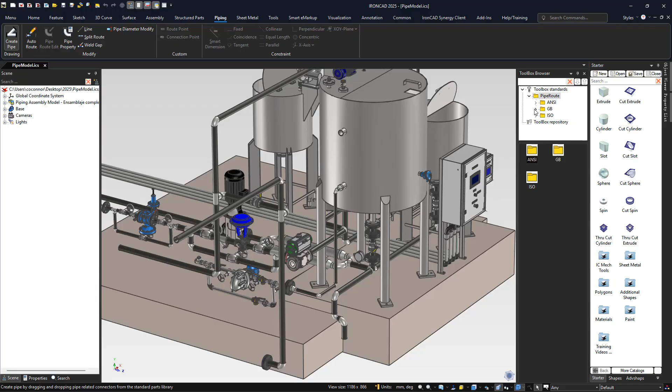But piping is what we're talking about today, so let me show you a bit about that. As I mentioned, the pre-release already has a sample set of data, which includes ANSI, ISO, and some GB files. You can see the sets here, and these mainly consist of pipe crosses, elbows, flanges, reducers, T's, and a pipe tube, for example, a simple pipe. That's the standard concept for the ANSI and ISO side.

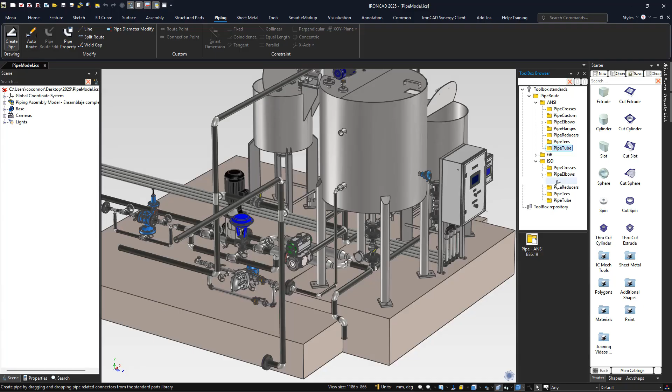This is currently built off of welded components, so most of the ones you'll see here are standards for welded pipe. In our case, we are going to work with the ISO side, and we're going to start with that flange. So we're just going to select onto our flange. We have two here that are available to us, and let's zoom in here.

What we're going to do is drop right onto the location with our weld neck flange, and we're going to drop it right on that center point inside of there, and now you'll be presented with a browser that allows you to select the various standards.

In our case, we have DN standards that we can set here. We can start with it, maybe we'll go up to 65 and see how big that is, which is a pretty good mix, but we can see that the inner pipe is a little too large for that.

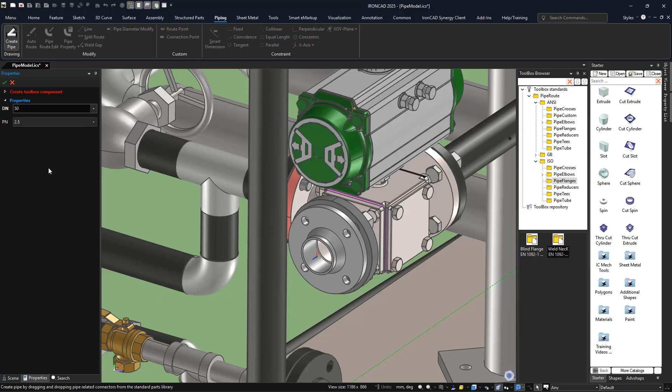Even if we're at the lowest pressure rating size here, let's go ahead and change that down a little bit, and maybe we can just bump it up a little if we need to get the right pressure. So that's a better size for our pipe.

Inside of there, let's change our pressure to maybe 6 here to see if that will update. Maybe we'll go to 10, see if that's a better size. That's a better fit, and it also lines up with our holes. So we'll use that one as our flange.

So that's our starting point inside of there. I'm just moving this around here so we can see it a little bit better. So now we're going to go ahead and hit OK.

This will take us into our pipe settings. In our case, we have a pipe that's going to be set for that 50 size DN that we selected for our flange. And then we have series inside here, which is basically your thickness on your pipe, so you can set different thicknesses.

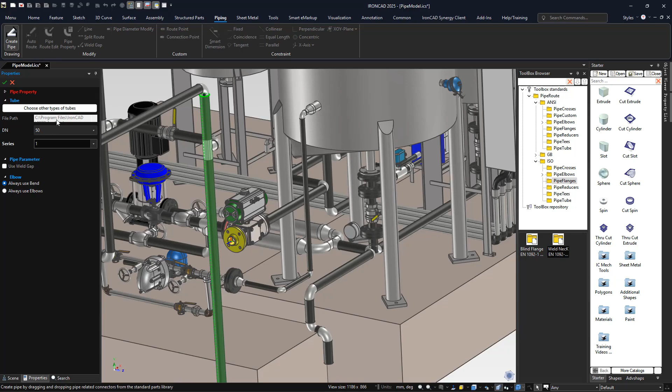And then you can add certain things like your bends or your elbows. So if you want to use a bend that just creates a pipe using a regular bend, like a sweep bend, you can use that. Or if you have elbows, you can select that as well.

By default, it'll go to the 90 for the particular standard that you started with, which in our case is ISO, so it's going to use the 90s for the ISO, which we'll use as our standard. So we'll go ahead and hit OK to apply that.

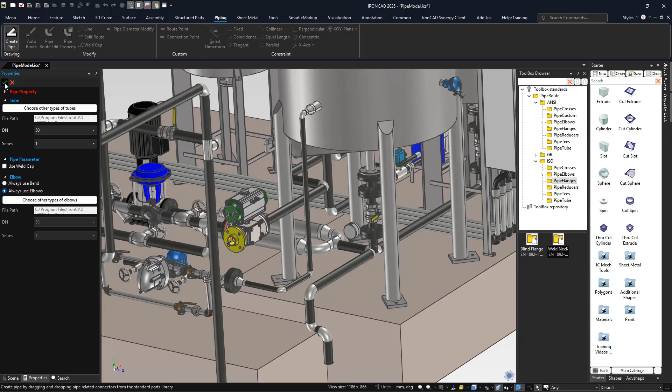And now it'll actually start us into what we call the 3D curve mode. In this case, it's really just talking about line geometry. We already have a starting point here for our curve, which we're going to use as our starting point, and we're going to use another line up here.

So we're just going to zoom in here, go to our line command on our ribbon bar, and we're going to pick that starting point as well. You can see this is similar to our 3D curve, which if you see the arrows there, it's got an X and Y. You can hit tab to change your arrow directions if you're trying to go different directions.

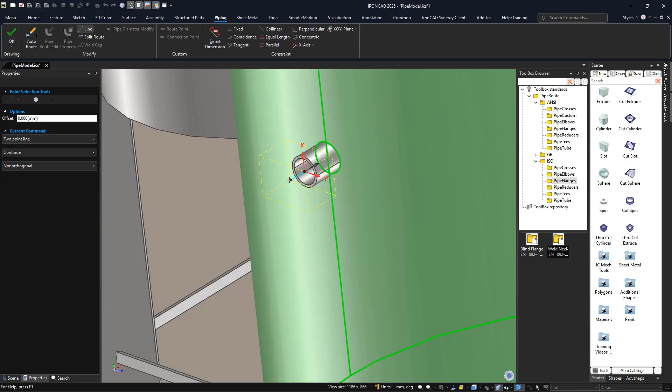In our case, we just want to come out of that pipe a little bit, and we can change it to not orthogonal or orthogonal if you like, so it only goes in certain directions. We want it to come straight off this pipe, so we're going to pull this out a little ways, and we can hit escape because we only want a single line.

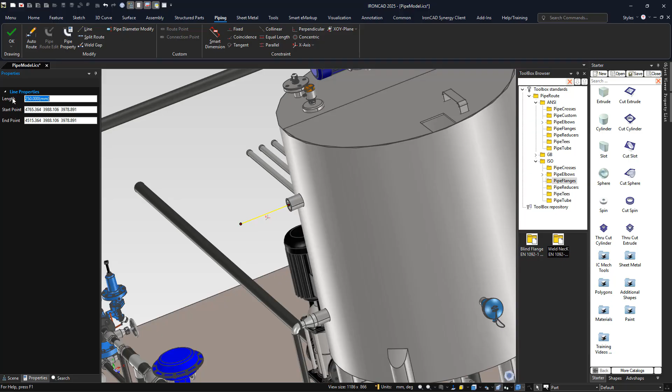And when we select this, we can also type in what the value is. So maybe we'll say that's 250 for our length, hit enter, that will adjust that line. So that gives us our lines for our start and our end, and now we can do the auto route.

On the ribbon bar, you'll see this command, auto route, and we're just going to essentially pick our start point and our end point, and it's going to give you a path for that.

So this gives you a path based on using a YZX path, but you can change these to various other ones. If you want to try a different direction, that'll remove that section and change to another path. That seems like a better path for what I want to do, and I can just go ahead and hit OK. That's what we want to run inside of there.

It's going to swap out those bends instead of using regular bends and put our elbows on there, which are the yellow colored, and then the pipe runs. You'll see in our tree it actually creates this nice pipe run inside of here, which gives you the route information, the components that are being used inside of there.

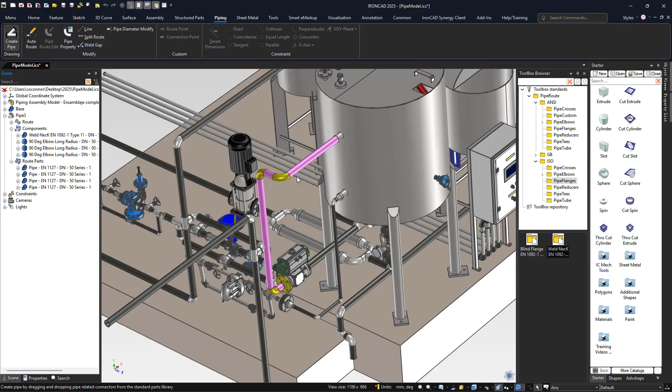That's going to be your bill of material information for those components. So that's a simple way to use this tool to build an auto route. If you want to add other components, you have to be in route edit mode. For example, if we want to make a T on this guy, we can select this part, right click and say edit pipe route, or do that on the ribbon bar as well.

Now that we're in the pipe route edit, we can go back to our catalog browser and select other things. For example, we can select a T, and simply drag and drop that onto the curve. Once we drag and drop that on there, it'll tell us we're using a specific standard, which we've already used on our pipe, and it also gives us our series. We'll go ahead and hit OK.

When we hit OK, that'll orient the T to our line correctly and change it to a yellow color because it's a new component. We can select our line if we want to orient this guy, pull that line, or change its length. We can do either one.

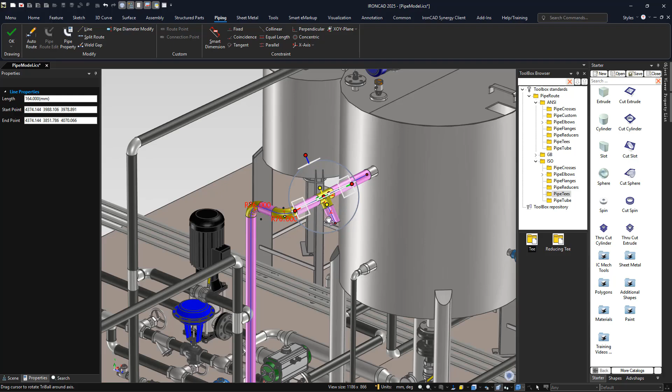In our case, we want to orient that, so we're going to turn on our triball, and we can use a triball to align to this existing pipe. We want to rotate that, so we want to lock that axis and make this perpendicular to our top face or floor, whichever one we wanted to use in this case.

Now that we have that, we can hit escape out of there, and if you hit in the background or hit OK, that will exit that command. That will just create your component inside of there, but if you wanted to edit again, you can always right click and go back to the route edit mode.

In this case, maybe we want to change this line to be a little bit longer. Maybe we'll change it to 300. We can do that, and that will adjust our pipe.

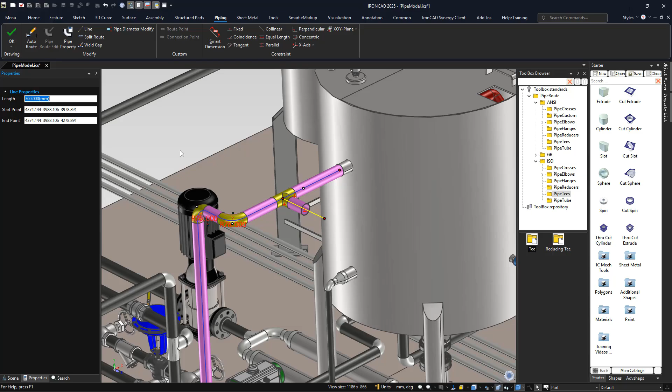Now, again, you can use this auto route at any time. For example, if we want to add another component down here while we're in edit mode, we can do the same thing. We can zoom in down here, go back to our flanges, and drag and drop a flange onto this component.

I don't have a center point, so I can just hold the shift key down and select that center point. I'll connect it, and we'll just use the same flange for now. This was a 10, I believe. There we go. We'll go ahead and set that, hit OK.

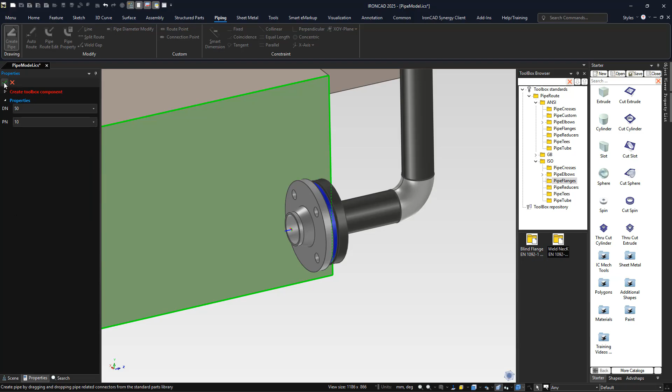And we'll just use that default pipe there. Now we can do the auto route again. We can just select our point and our point, and it'll do that pipe route run. In this case, that might not be the desired direction because it's kind of going into my floor there.

I can see that, so let's go ahead and change that to a different path. It'll redo that to the Y path. That looks like a better route for us, and we'll go ahead and hit OK.

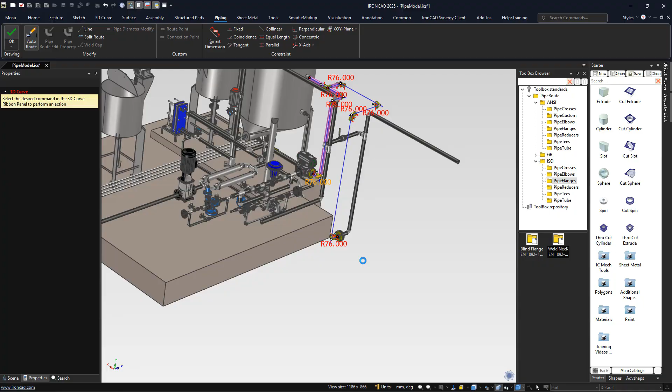That's an example of how this can be used, and this will update again, creating all the components that you've used in that run. Let me zoom in a little bit here so we can see this better, so you can see all the components are created for you. They're colored so you can tell them that it's part of this pipe route.

Again, this is a specific component that we create, so you can actually add this to other assemblies. If you want to drag and drop it into an assembly or assemble it and add other components, you can do so as well, and you can continue to work like you do with IronCAD's components and assemblies. Now, other components can be added to this.

Again, reducers can be added, crosses, elbows. You can even use some sort of custom components, like an end cap and a stub end, to add to an end of a pipe. You can do that very easily by just drag and dropping that on there.

Some things may not update in the current version when you change the length, but we will fix that for the official release. That gives you a quick overview of the pipe run capabilities.

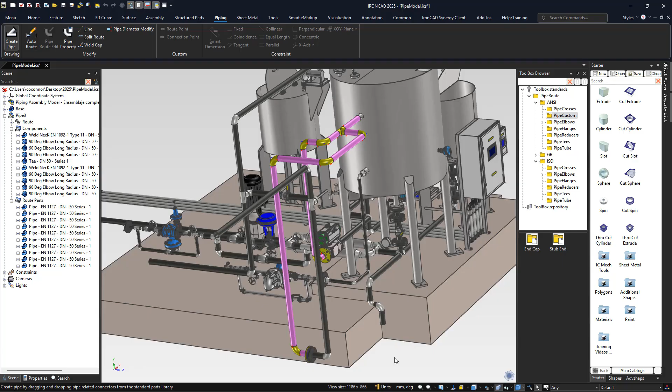Again, this can be created into the drawing, and the bill of material will be created for all your components. A lot of these components already have some naming conventions inside here. If you look at the part properties, it's using formulas to pull parameter information, like the parameter you picked for the DN, and also maybe the pipe type in some cases for your pipes and elbows. It'll pick those series as well.

So there's some things we're still improving on, especially to support text-based parameters to be used in these components. Those are some things we'll fix in the official release, but you can get an idea how this is going to work in the pre-release version.

So all those things will be called out in the bill of material on the drawings. If you use our drawings, we have two types: one is the ICD, which can be used to create this in the bill of material. If you use CAXA Draft, there's also an option to create the pipe route, which will actually draw the center line for all the pipe run components, so you can dimension the center run, center points, and center lines of these components in the drawing.

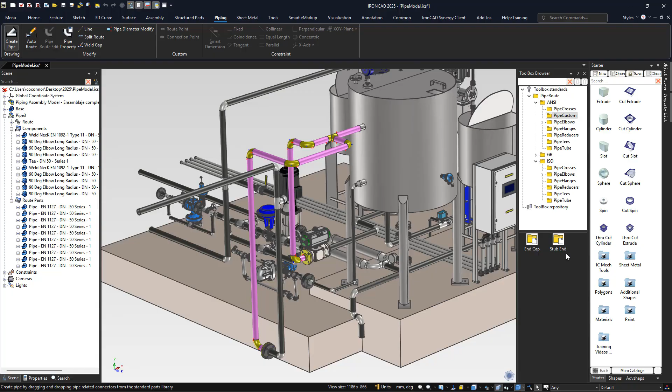Okay, so that was a good example of how piping can be used in IronCAD, and a quick overview of what's currently available in the piping module.

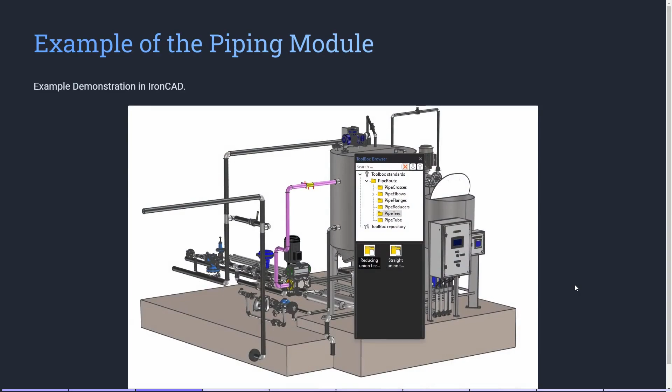Okay, so the release plans for the IronCAD piping module. Currently in IronCAD 2025 SP1, the module is available in a pre-release state—basically what I showed you today is available in the current version. This is targeted to allow you to start testing and becoming familiar with the application, seeing how the toolboxes can be used, and allows us time to add additional standards for the official launch. We'll also continue to develop the components to refine and add improvements to the usability of the product.

Our IronCAD 2025 PU1 release is officially targeted to release in the April timeframe, and that will include all the components you see here, all of our improvements, and more components to the standards—not limited to just ANSI, ISO, and GB. We may add other standards for the PU1 release. And as we continue to develop going forward for our 2026 release, we'll add more components and continue to grow this piping module.

So how do you enable the piping release module? There are a few steps you have to do inside here to do that.